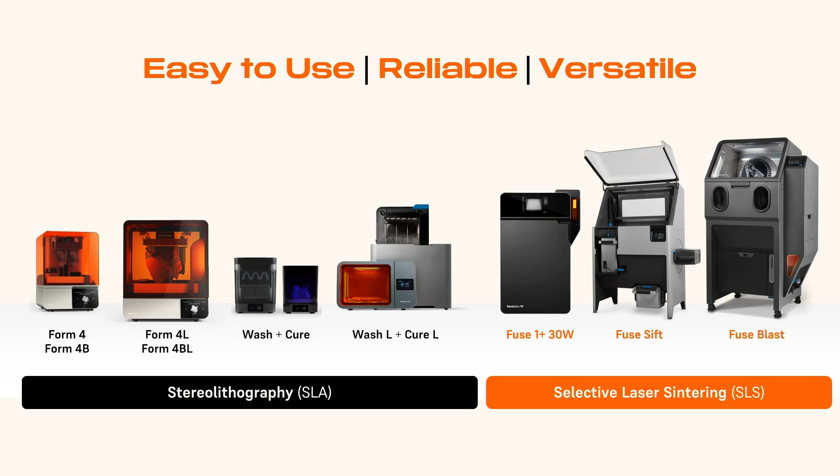So if you know our products, which I think all of you do, you know that they're very easy to use, very reliable, and very versatile. And this has earned us many happy customers across SLS as well.

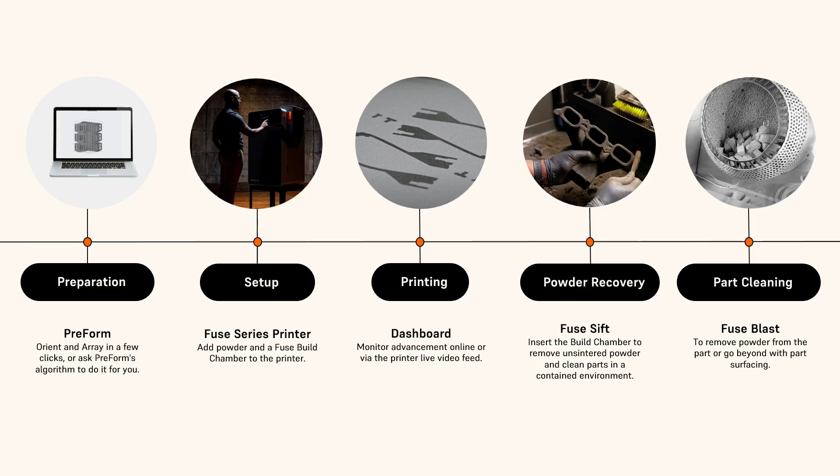There's a reason why more than 50% of all SLS users choose the Fuse ecosystem. For one, it's very easy to use with a complete end-to-end ecosystem that takes you all the way from creating your parts in CAD to getting a finished, clean part, with automation in between and a very simple, easy-to-use ecosystem. We're also a very versatile ecosystem with a bunch of different industrial materials for pretty much any application you might need, whether soft, stiff, or flexible.

And of course, the ecosystem is also very reliable, which has earned us many happy customers who trust Fuse for the toughest jobs, for innovating, for driving that innovation as fast as possible, and for all kinds of new types of applications that we just keep building on every year.

And that is powered by the Fuse 1 Plus. I'm a huge fan of this printer, obviously. It's an industrial workhorse—you can get your same-day SLS parts. It's incredibly fast, and you can get a very large set of materials, all of which work very well for different applications. But productivity isn't just about printing.

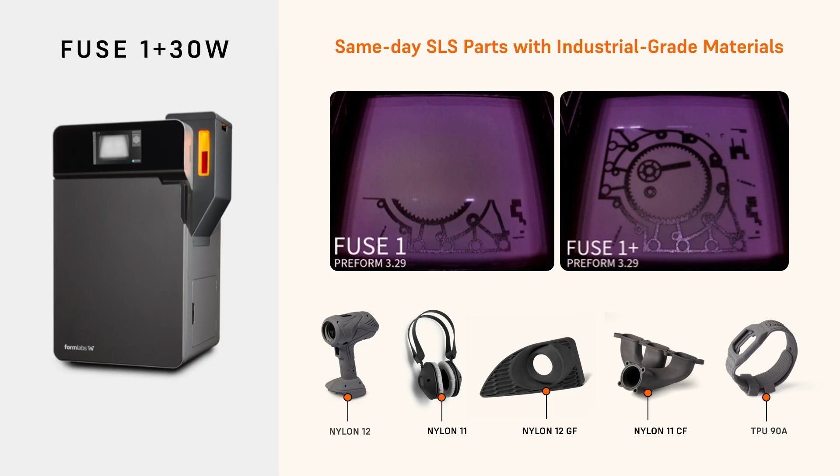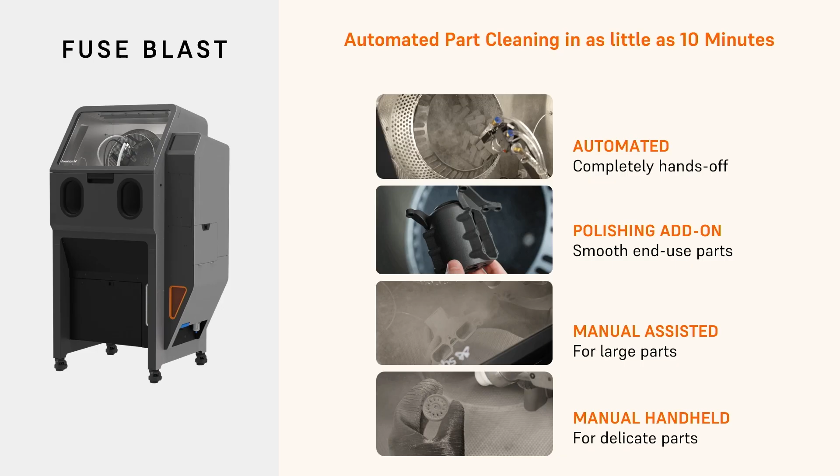It's also about post-processing. The Fuse Blast, which we announced last year, really takes you to that next level of productivity with automated, completely hands-off part cleaning. We now also have a polishing add-on, so if you haven't tried one of the samples, we've got a bunch over in the other room. You can get really nice, smooth SLS parts that don't necessarily look SLS printed—very cool—as well as really nice ergonomic functions for manual assisted or manual handheld cleaning for all kinds of parts.

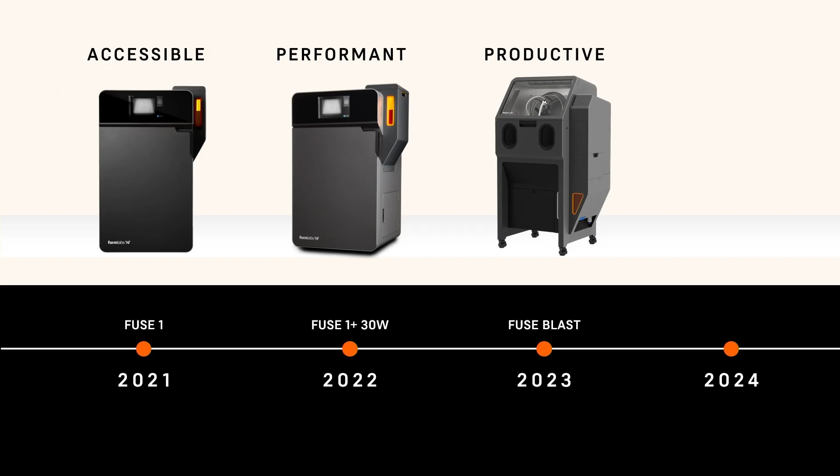And as Nick said before, all of this innovation is driven by you guys, our users, who have been telling us that you need accessible SLS, performant SLS, and productive SLS. Going into 2024, we tried to think about what it is that you guys need, and you told us that you need even more of all three of those things. And I'm happy to say that this year we delivered.

So we had the biggest set of SLS products that we've launched this year ever, and we're continuing on an awesome path forward. Just to highlight a couple of things that I think are really exciting.

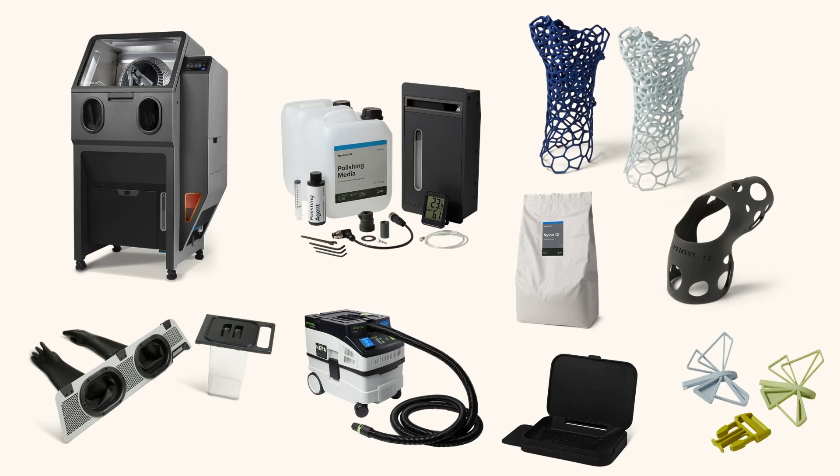We have even higher throughput through awesome algorithm and software improvements. Now you can get 14 hours for 95% of all full Nylon 12 builds, or 8 hours for an average customer print, to really get you that same-day part throughput.

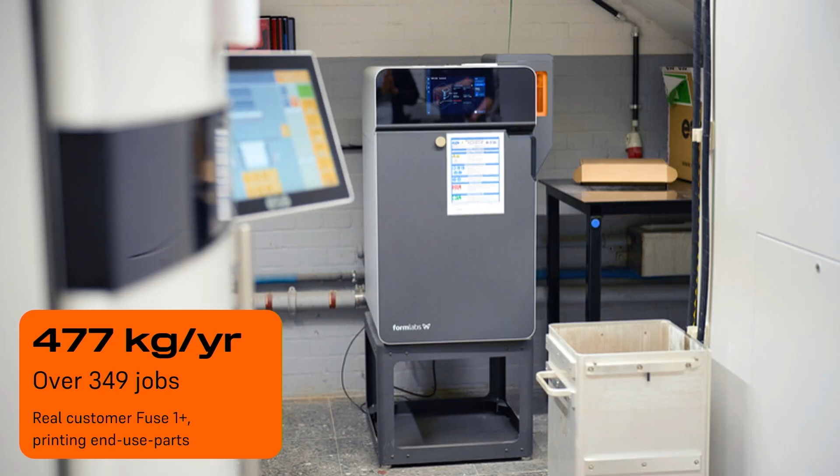And that means our customers have been able to get massive productivity gains. Now they've got Fuses printing end-use parts in industrial situations. For one example, we have a real customer printer that is printing almost half a ton of parts per year over 349 jobs—so almost one print per day. And we're getting more and more customers reaching this level of productivity, really pushing the limits of Fuse.

We've also really focused on production economics as well as production throughput. With bulk powder pricing, your part costs can scale with your usage to make sure you're getting the most out of your Fuse as you continue to ramp up. And of course, we've continued to give you even more applications.

For example, with nylon 12 white, for the first time on an SLS printer under $100,000, you can get white parts that you can then color, dye, and polish with the Fuse Blast polishing system with a really easy off-the-shelf setup. So that's just a little bit of all the different products we've announced this year.

There's a lot more, but as promised, I'm not going to just give you the pitch on the ecosystem. You guys know why it's awesome. But I want to give you guys a little something to walk away from this with.

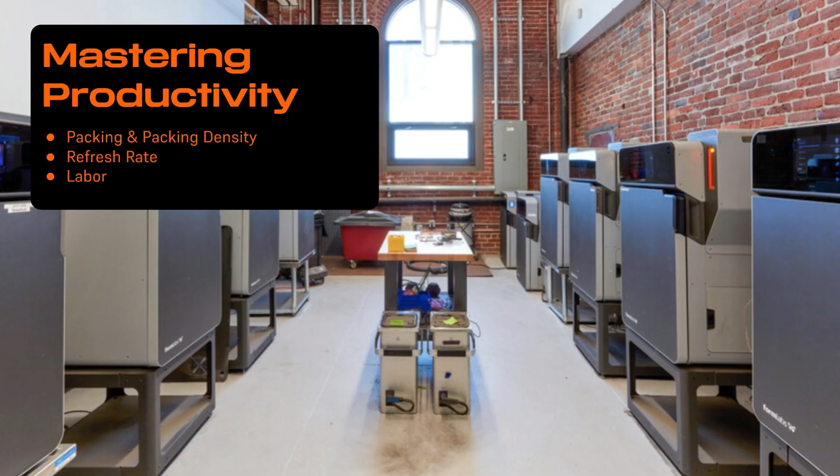So we're going to pivot a little bit and talk about mastering productivity on the Fuse. How do you get to be those customers printing half a ton of parts per year? We're going to talk about packing and packing density, a quick recap, then refresh rate, and wrap up with how to think about labor across the Fuse ecosystem.

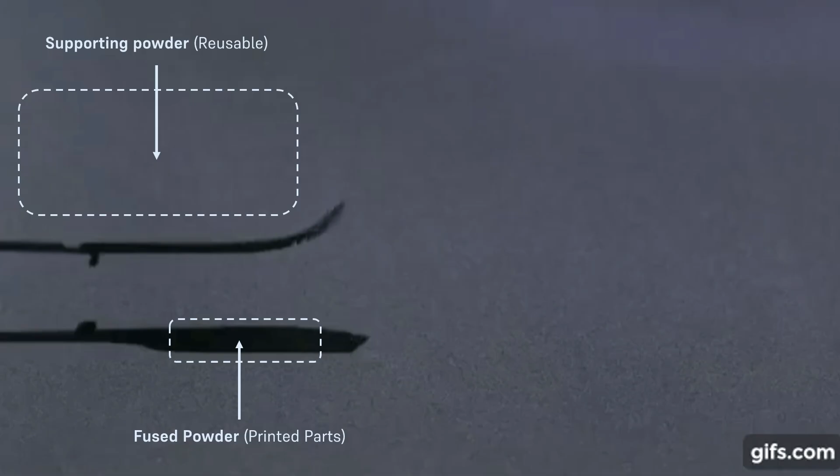Real quick, you guys know this already, but on SLS, you get your sintered parts, and that's supported by the supporting powder, which is why you don't need supports on SLS. They're all built up within the cake. If you take that cross-sectional view through the build, this is what it looks like: you have sintered parts and you have the supporting powder.

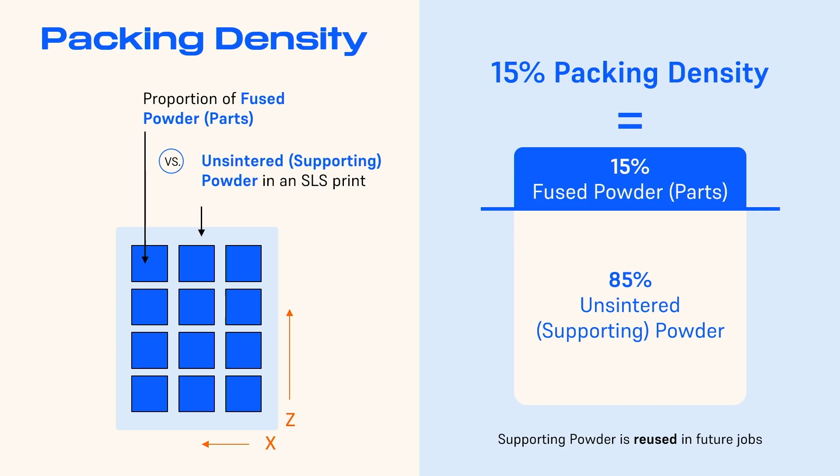Now, packing density is the proportion of that fused, sintered powder in your build to the unsintered and supporting powder. So for example, in the image on the left, you've got your parts floating in the powder. If you were to calculate it, it would come out to about 15% of all the powder being sintered, and that is a 15% packing density.

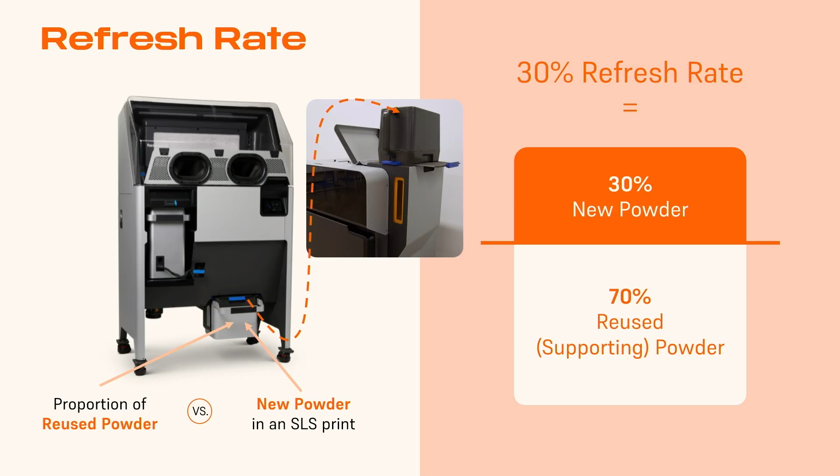The really cool thing about SLS, as you guys know, is that you can reuse that unsintered supporting powder, and that's defined by your refresh rate, which is the proportion of that reused powder to the new powder that you add into the next build. So for every build, I go to my Sift, I tell it 30% refresh rate, meaning 30% new powder, 70% used, and then I start my next print.

Just to plug again, very easy to use ecosystem, Sift does this for you. You just push a button and it handles all of that for you. There's a reused and a new powder hopper.

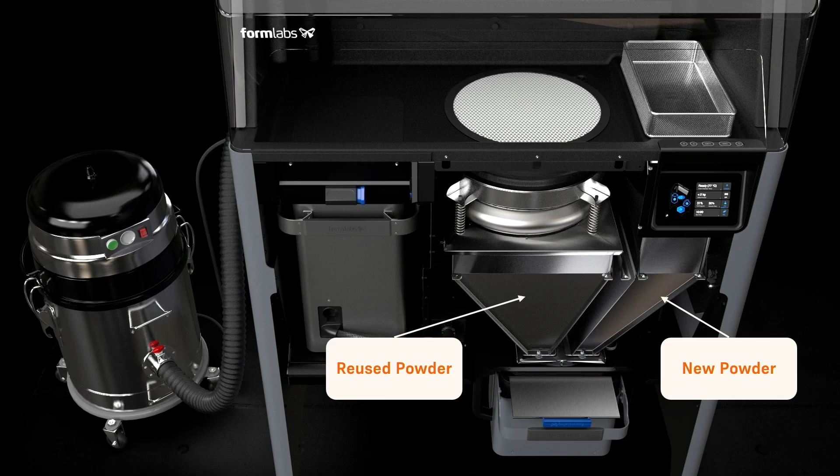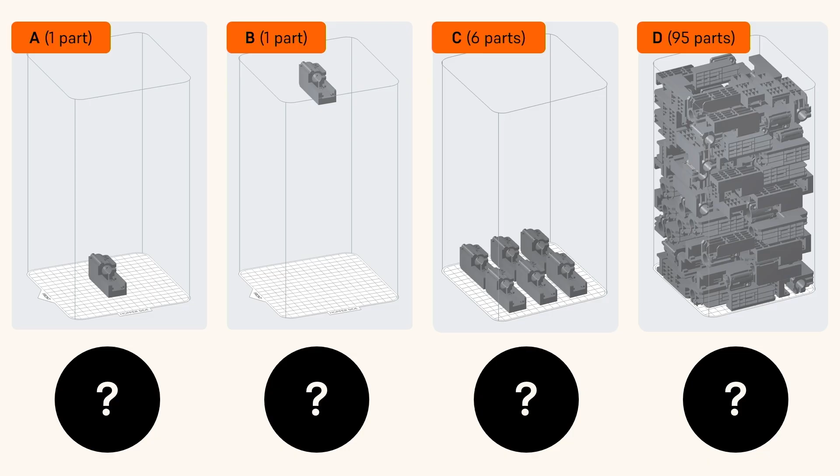It's all very good. But if you've been paying attention to the last 5 minutes, I'm going to do a little pop quiz here. We're going to show you a couple different builds and see if you guys can guess, given packing density and part cost, which one would give the lowest part cost. Is it A? Let's get a show of hands. Nobody for A. B, C, or D? D? Okay, we got a lot of hands up for D. We got a lot of smart people in the audience here, because yes, in fact, the lowest part cost is letter D.

That's because we've got a really high packing density. We got a lot of parts in there, making the most out of our 3D space. But if you were to look at B, you might see that that is very expensive. What is different about B? I thought I could reuse all my powder.

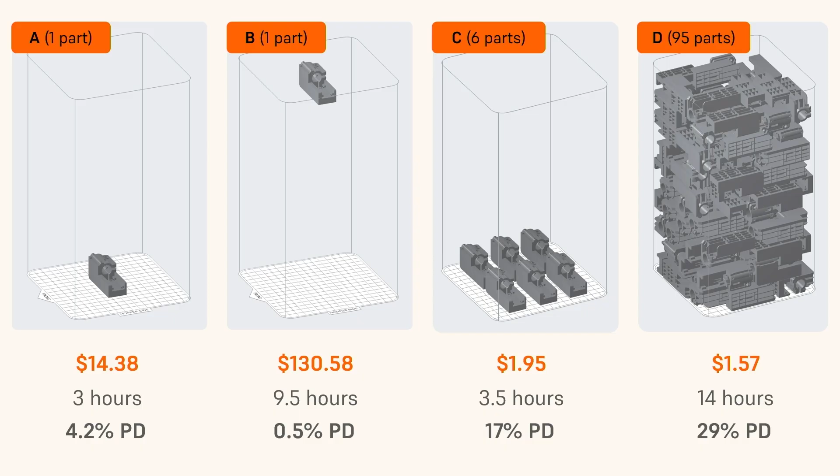This is where the interplay of packing density and refresh rate comes in. So if you have an average build that you keep printing at 15% packing density, you actually can't reuse all that powder for the next build because you can only get 70% used. So you see there's a mismatch between the used powder I'm producing and the used powder I can reuse. A quick takeaway: match your packing density to your refresh rate as much as possible. Get the most out of that build space, get the most out of that build volume, and then you're going to get the best part economics.

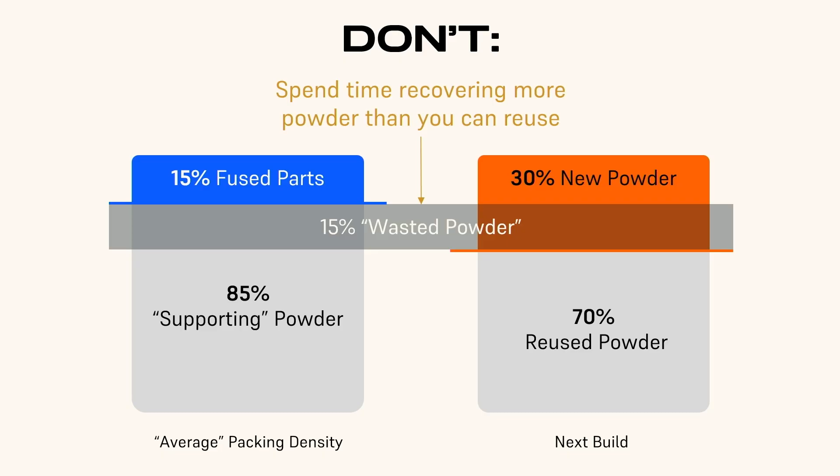Before the fuse blast, people felt they really had to clean in the sift a lot. Now that we have that, you can throw your parts in and they'll get cleaned. But we still have a lot of people wondering, how much powder do I need to recover? The answer is only as much as you need to actually reuse. That's easy to say, but in practice this is a decision people have to make day-to-day when cleaning parts in sift. The question is, what is enough recovery?

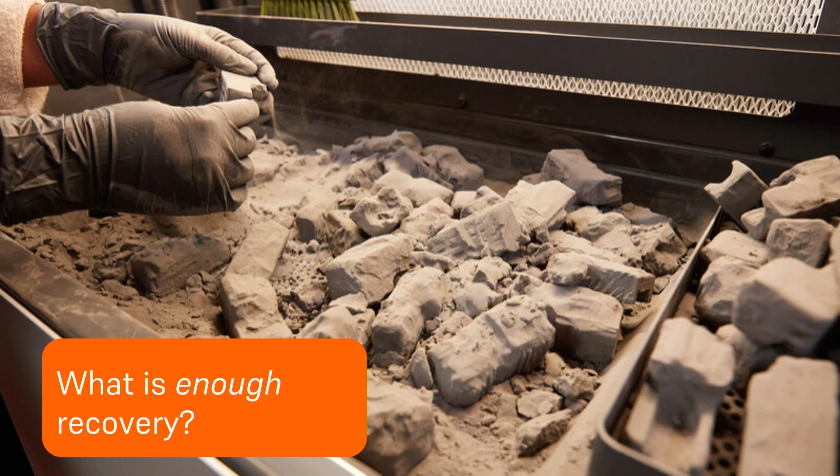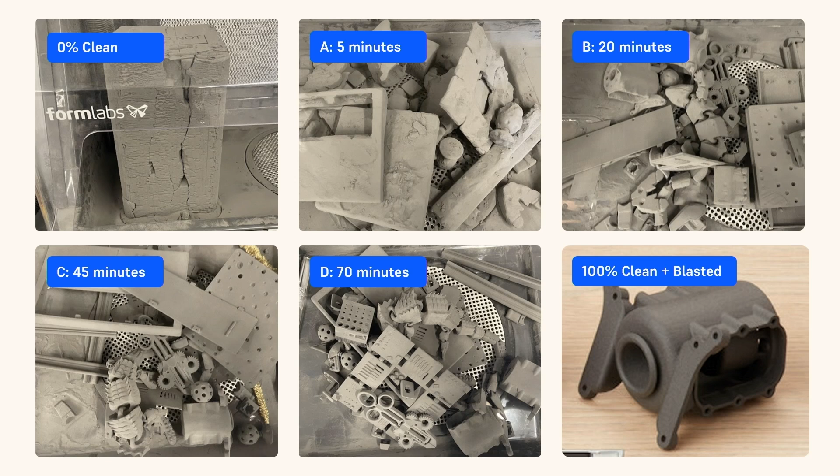We're going to do an exercise together with some shows of hands. We're going to track this build. On the top left, you've got 0% recovered, still in the cake in sift. On the bottom right, you've got fully cleaned after a fuse blast session. We're going to step through different stages of clean and figure out which one is 70% recovered - A, B, C, D, E, or none of the above - just doing it visually.

Can I get a show of hands? Who thinks D is 70% recovered? Okay, one person. How about C? We got a few hands. How about B? A few more. How about A? Most hands for A. How about E, none of the above? We're really evenly split here. We've got a bunch of experts here, and I think this shows it's not super straightforward.

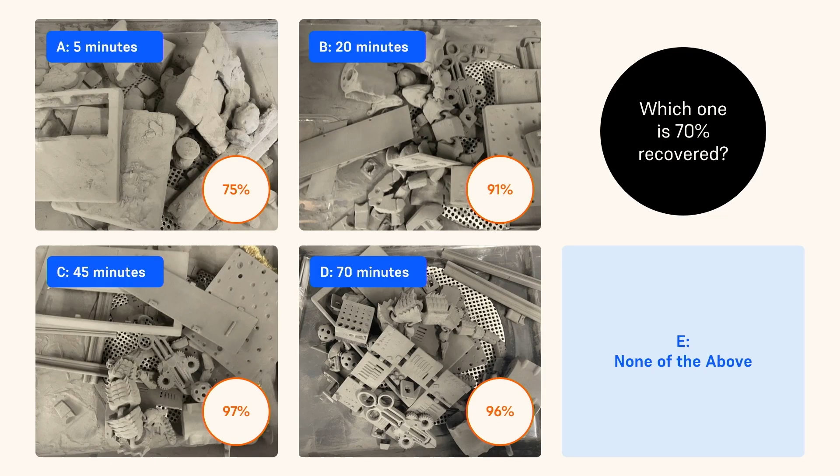The answer is actually E, none of the above. These are all more than 70% recovered already. After 5 minutes, you've already gotten back more than 70% of the powder that you need for the next build.

If we can pull anything away from here: number one, match your refresh rate to your packing density as much as you can for best economics in a production circumstance. Keep iterating, increasing that packing. Number two, you're spending too much time on sift - most of the time you're probably spending too much trying to get powder back. Take the parts out, knock them off, and you're probably already at 70% in the first 5 to 10 minutes. And if you have the fuse blast, it makes your life a lot easier.

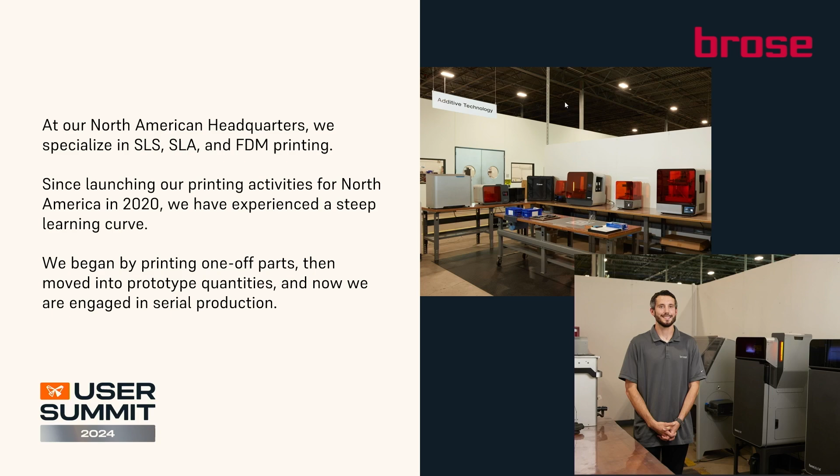First of all, we have additive technology split up into two locations for Brose. There's a headquarters in Germany which also does R&D work. They hold some patents and have PhD folks available to push the envelope. And then we created another location within my department in North America, located in Auburn Hills, Michigan. The initial idea was to create a shop that prints single parts and prototype parts, but we realized pretty quick that the technology gives us way more than just single part prints. So we found a way to get into serial production.

But going to that point, why we did choose Formlabs and why it's so important for us: we looked for a partner that is, first of all, US-based, because we needed support quick. Again, I didn't want to build an R&D center. I needed somebody in case the printer has an issue.

Especially when you talk serial production, Formlabs acted very well on that point. We had turnaround times of 24 hours with them supporting us on site, etc. So this was really crucial for us to make that happen.

On the other hand, we looked at items that are low maintenance. We didn't want to invest a high labor amount, so that was a big point for us. And if you look at the Fuse in particular, if you change over and you have two build chambers, which is key, you can do change overs within minutes.

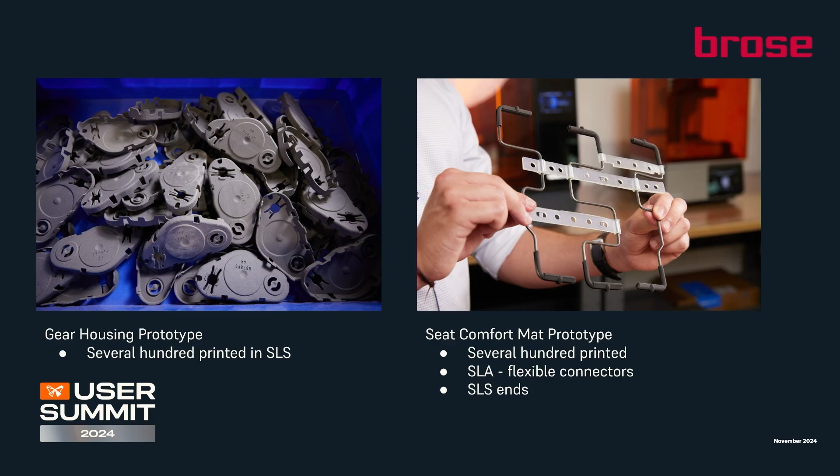Now talking about how we got into serial production: when we talk prototype for automotive, especially in our area for seats, prototype is not just your 50 parts. Usually we talk somewhere between 100, 500, 800 parts for prototype builds. So for a lot of people this is already like a small serial production. For us, this is everyday business.

On this side you see a gear housing that we printed. In this case, several hundred were needed. We definitely, when we go into higher volumes, always choose SLS for a simple reason - I mentioned labor, we try to do it as lean and efficient as possible. I'm not a big fan of support structures, so that really helps us make the decision pretty simple.

On the other side, you see where the two technologies actually meet, where you can use SLA and SLS in conjunction. This is a comfort mat, which later gets installed into your seat adjuster. It's basically where you sit, to give this nice, comfy feeling. For the SLAs we use the Form 3s and Form 4s - we have several dozens of those throughout the Brose group.

And I can tell this, and I discussed this earlier with Formlabs - I'm not getting paid for this, by the way - we've had several hundred prints already on the Form 4, and we had literally one failed print. This thing is so reliable, it's almost unbelievable. No wonder they made it onto the Time Magazine here within 6 months. Now let's talk about the transition from prototype into serial production.

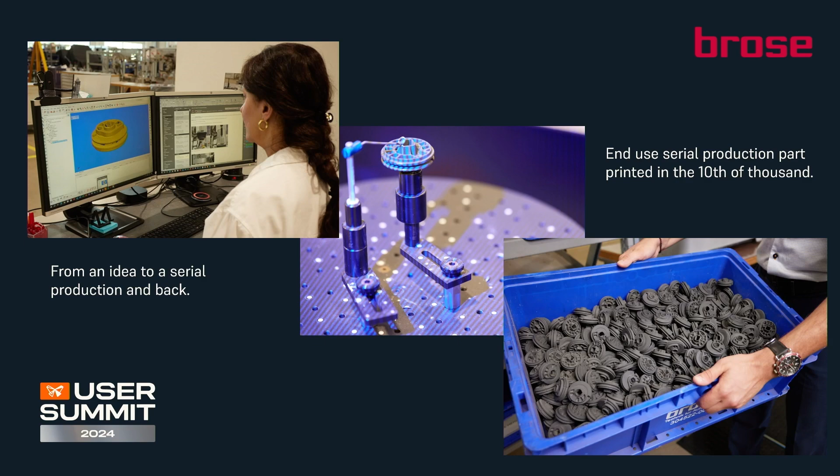This is also the key technology to transfer over into serial production, because now you come into capability studies. You need to hold different quality requirements - this is really key. On the bottom picture you can see a pulley that we 3D printed, several tens of thousands of parts that we used for end-use customers in current vehicles on the street.

When we talk serial production at the moment, we talk gap printing. What does gap printing mean? It's basically: you have an existing tool and there's a design change on that tool, and there's a certain grace period until you get a new tool. This can, in serial production, vary between 12 and 24 weeks, no problem. So this time transition we refer to as gap.

That gap printing is what we use when we 3D print those parts needed in between. Serial production for us at this point is not from SOP to EOP - it's really some niche in between. But this niche is really what pushes the envelope further to get into serial production.

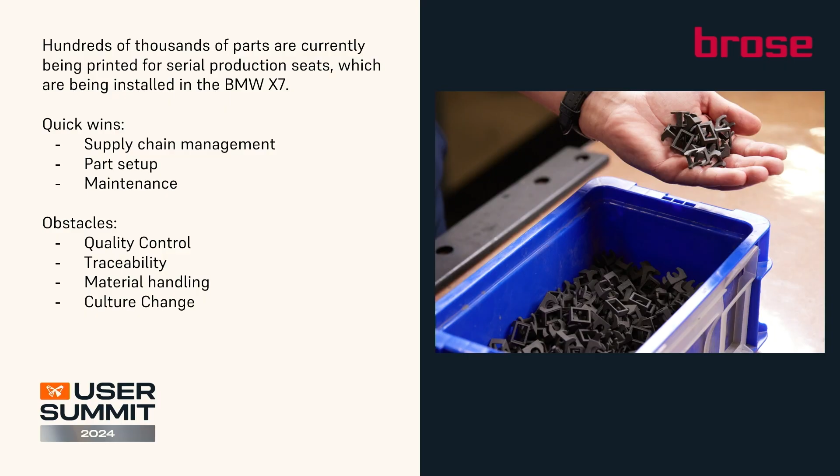You have to make in-process checks, like we installed envelope gauges where we press through a certain amount of parts just to see if they still hold the dimensions, right? You have to make checks that your tumbler doesn't break the parts when they interlock with each other, etc.

Another good point mentioned earlier: make sure you report problems back to Formlabs. I mentioned it to Matt earlier. I always feel like this is super important, a real highlight. The other day I told Formlabs, hey, I really need a cage where I can print those parts in. Two weeks later it was like, hey Matthias, you got the cage. It was already in the works. It wasn't for me, but it made me really feel good. So yeah, address those issues. This is really important.

Then traceability is the next item. When we print prototypes, usually you print several hundred parts or 50 parts or whatever, and then you set them aside. For serial production, now they actually go into a sellable vehicle. A seat structure is something that really saves lives out there. You put a child seat in there, you put a kid in there. This is really something you don't want to mess with.

So when it comes to traceability, and this falls into quality control too, we have to have traceability from the batch we printed down to the printer log file. So we created labels that follow those parts around. Pretty neat, right? You'll see that in PreForm too. You can add labels to the printers as well, or to the individual parts, if you want to. This is something crucial so that you don't mix up batches anymore.